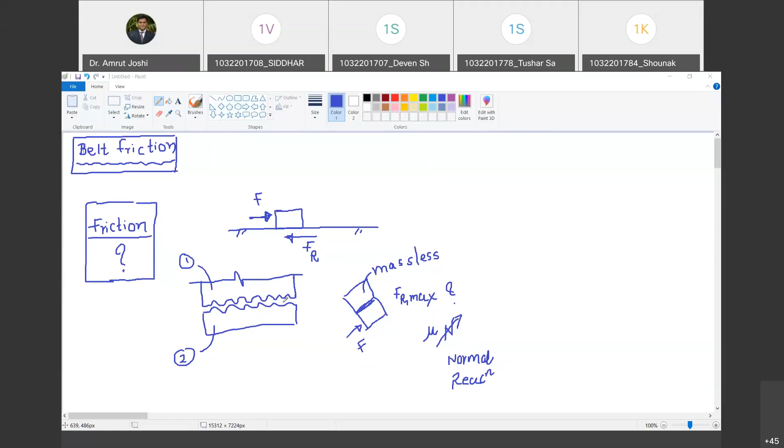Ahead. So we have these two objects which have a common surface in contact. That surface is not going to be smooth. It is going to have crests and troughs. Do you agree with me, Shounak? Yes, sir. Okay. Now, if there is a tendency of relative sliding between the two objects along this common surface, are you with me? Yes.

If there is a tendency of relative sliding between these two objects along the common surface, then there is going to be a frictional resistance. Do you agree with me? Yes. That frictional resistance will come into action only and only when these crests and troughs are interlocked. Do you agree with me? Yes. So what is going to ensure the interlocking?

The interlocking between the crests and troughs of these two surfaces will be ensured by a normal thrust. Do you agree with me? Yes. If you have a force like this, then only there is a possibility of interlocking between the crests and troughs of these two objects in contact at a common surface. Happy? Yes. Okay. So when we say normal reaction, first of all, that reaction has to be compressive in nature. Are you with me?

If it is in this direction, is it going to cause the interlocking of troughs and crests? No. In fact, it will try to separate the object. Are you with me? Yes. So therefore, only and only when this reaction is thrust in nature, thrust matlab compressive in nature, then only there is a possibility of interlocking between crests and troughs of two objects at a common surface. Happy? Yes. Okay. So we understood that this reaction is compressive in nature.

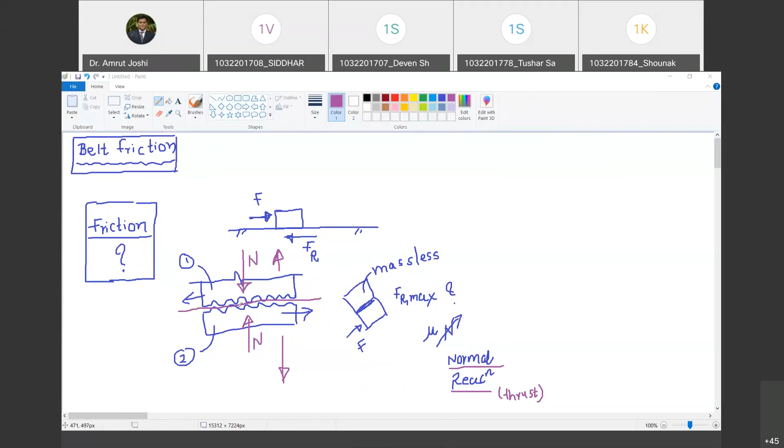So दो चीजें हमें समझ में आई. कौन सी? Point number 1, the force has to be normal to both the surfaces in contact. Are you with me? Yes. And it has to be compressive in nature. And that normal thrust is going to ensure the interlocking of these crests and troughs within one another. And that is going to give rise to the frictional resistance, because if you have to have this relative sliding, then you will have to break this interlocking between crests and troughs. Are you with me? Yes, sir.

So another observation or interpretation that we can make is, as the magnitude of N goes on increasing, the frictional resistance that can be offered between the two surfaces is also going to go on increasing. Do you agree with me? Yes, sir. So therefore, as the normal reaction or this normal thrust increases, the frictional resistance that can be offered between the two surfaces also goes on increasing. Happy? Yes, sir.

Now the question remains whether this frictional resistance is directly proportional to normal reaction. That means, is the relationship linear? If I double the normal reaction, is frictional force going to get doubled, is the question. Or whether this Fr varies as an exponential function, N power e, of this normal force. Are you with me?

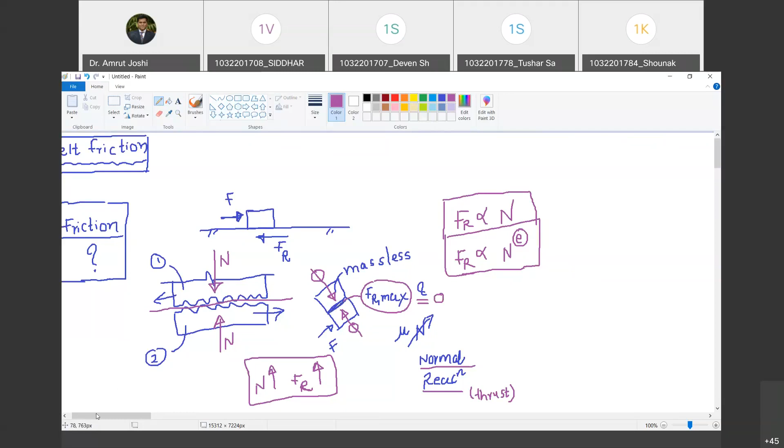Now, let us perform this experiment in a slightly modified fashion. Let us say these are the two objects in space. This is the common surface between the two objects. This is object number 1 and this is object number 2. These objects are subjected to balanced forces as shown here. So this is the force on object number 1, I am going to call it F1. And this is the force acting on object number 2, which is F2.

And these two forces are perpendicular to this line. And F2 is equal to F1. It has to be for equilibrium; we will see that later. Let me call it F itself. So दोनों forces को F ही बोलता हूँ. Now can you tell me what is the maximum frictional resistance that can be offered between the two surfaces? It is going to be non-zero. Do you agree with me? Fine. So this resistance is going to be non-zero.

Now I am going to perform a thought experiment. Obviously, I have not yet uttered the word coefficient of static friction. अभी तक वो word मैंने utter किया ही नहीं है. चलो देखो, this is the force P that I am going to apply on these two objects along the surface in contact. Just let me know, when this P is equal to Fr max, can I say the relative motion between the two bodies along the common surface is impending?

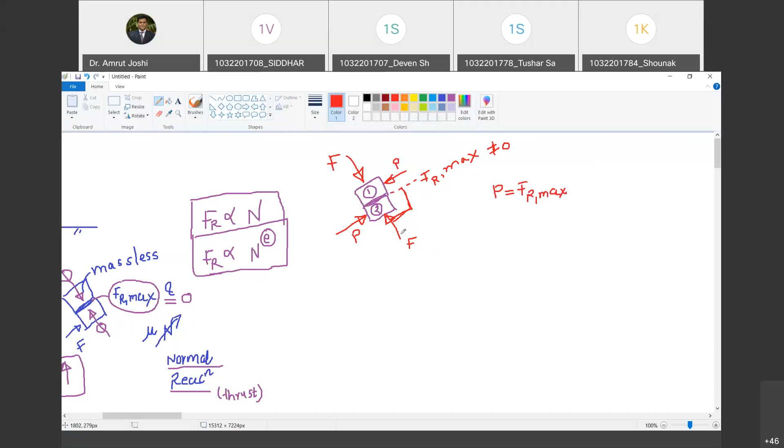Impending. This corresponds to impending motion. So impending का मतलब क्या होता है? Motion अभी चालू तो नहीं हुआ है, लेकिन P को थोड़ा सा और बढ़ा दो, the motion will begin. So whenever P assumes the value of Fr max, the maximum frictional resistance that can be offered at the surfaces in contact, that is the state when the motion is impending. If I increase P slightly beyond this, the relative motion between the two surfaces is going to commence.

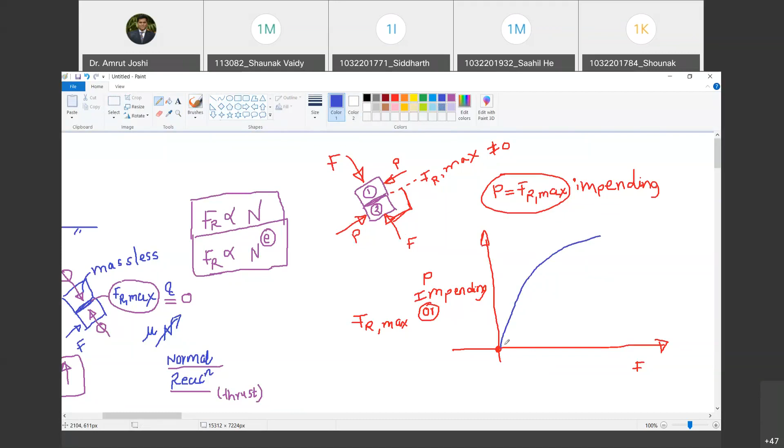Yes, sir. Okay. Now, as I go on increasing this F, जैसे जैसे बढ़ाते जाता हूँ, वैसे वैसे I know that the P required for motion to be impending, or the maximum value of frictional resistance between the two surfaces, is going to go on increasing. Happy? Yes, sir. But the question is, how does it increase? Does it increase in this fashion? Does it increase in this fashion? Or does it linearly increase? Are you with me? Yes, sir.

That is the question. So if you perform this experiment by changing the material of these two objects, by changing the cross sectional area, etc., ये सारी चीजें आप चेंज करके एक्सपेरिमेंट करते हो, to your surprise, you will find that this graph is going to be linear. Are you with me? Yes, sir. So that means the maximum frictional resistance that can be offered between the two surfaces is directly proportional to F. Are you with me? Yes, sir.

This F is also the normal force or normal thrust. Do you agree with me? Yes, sir. This normal thrust we can also denote by notation N. Are you with me? Yes, sir. So this is the graph that you are going to obtain. Linear one. Now, what is the slope of this graph? How do you find out slope of this graph? Tell me.

So what I do is, slope is delta y upon delta x. Do you agree with me? Yes, sir. So it is in this case going to be equal to delta P upon delta N. Do you agree with me? Yes, sir. So I will choose 2 points where delta N is forced to be unity. ये 2 points ऐसे है जिसमें if this is N1, normal reaction 1, and this is normal reaction 2, or this is F1 and F2. Are you with me? Yes, sir. I have chosen this N1 and N2 in such a fashion that N2 minus N1 is unity.

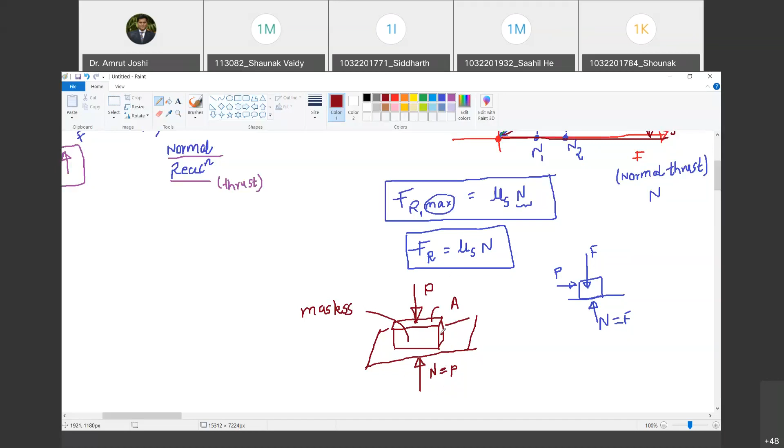Yes, sir. And I apply force Q here. Tell me, what is the value of force Q that I will have to produce in order to commence sliding of this duster on the table? कितने amount का force मुझे लगेगा बताओ?

So mu s into P. Coefficient of static friction between the two surfaces is mu s. So I will have to produce at least mu s times P force. Do you agree with me? Yes. So mu s times P plus small delta. This force will ensure that the block is moving towards right. Are you with me? Yes, sir.

और in other words, इसको ही दूसरे तरीके से describe करते हैं. Mu s times P is the maximum value of Q for which there is no motion. Do you agree with me? Yes, sir. तीन तरीके के डिस्क्रिप्शन में आपको बताने वाला हूं. Mu s times P is the maximum value of Q for which there is no relative motion between the duster and the surface. Happy? Yes.

Mu s times P is the value of force that I must apply on the duster to have the impending relative motion between duster and table surface. Do you agree? Yes, sir. Impending motion मतलब मोशन अभी चालू नहीं हुआ है, बट Q को और थोड़ा बढ़ाओ हो जाएगा. Are you with me? Yes.

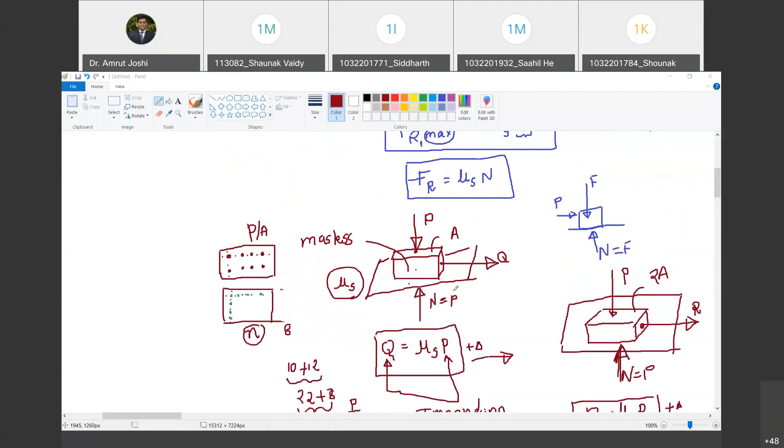As I go on increasing normal force or normal thrust, the maximum frictional resistance between the surfaces also goes on increasing. Do you agree with me? Yes. Rougher the surface, the frictional resistance goes on increasing in a stiffer fashion. So that means this line will approach y-axis. Are you with me? Smoother the surface, this line will approach x-axis.

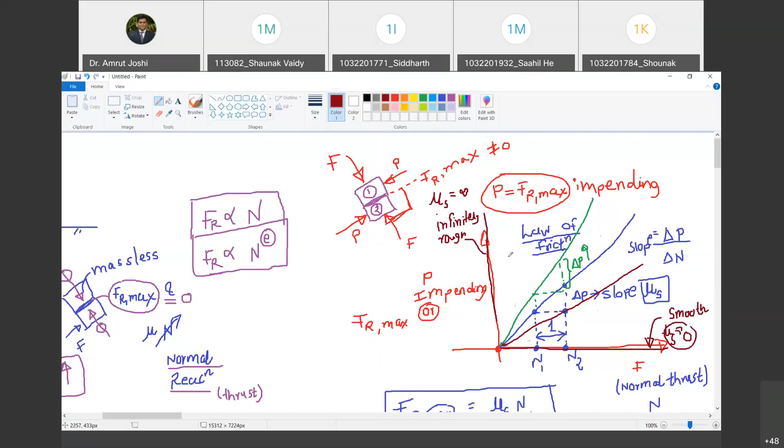For smooth surface, mu s is 0. For infinitely rough surface, mu s is infinity. For all normal surfaces, this line is going to lie between these two. Happy? Yes, sir. The maximum frictional force offered between the two objects at a common surface is going to be independent of area in contact. Do you agree with me? Yes, sir. It only depends upon the normal thrust and coefficient of static friction.

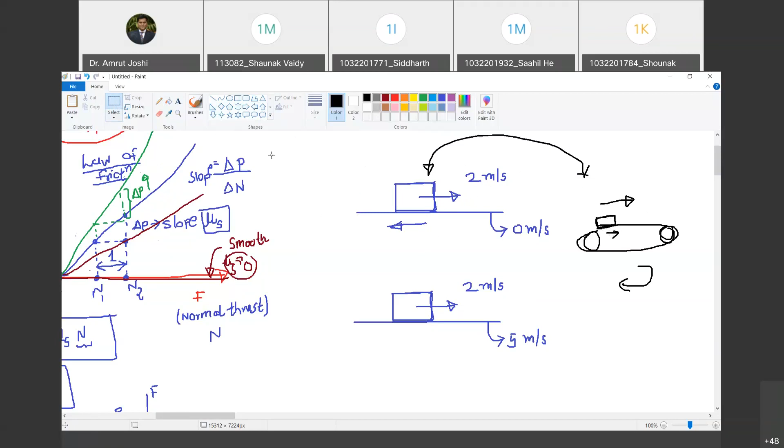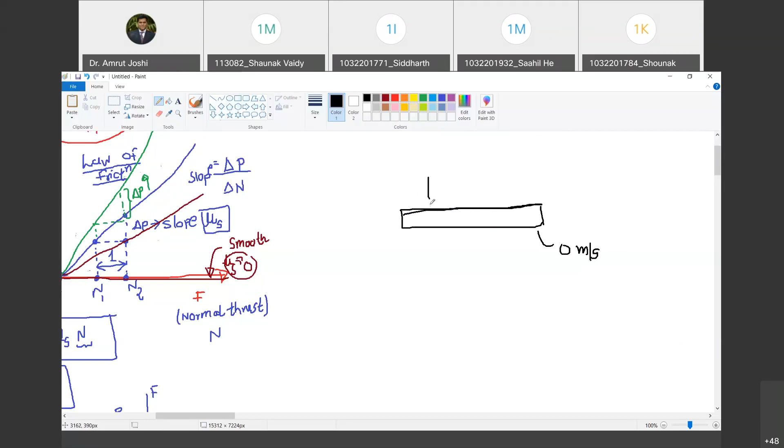So let us clarify that point. Henceforth we will never say that the frictional force is in the direction of motion. It doesn't have any sense. Why? Consider this situation. The table is not moving with any velocity with reference to the observer who is external to the table; its velocity is 0 meters per second. Are you with me? Yes. And there is a book or a duster on the table which is moving with the velocity 2 meters per second with reference to external observer.

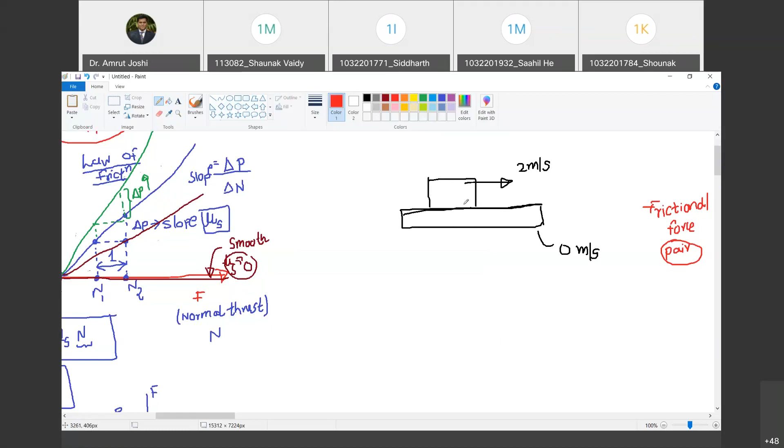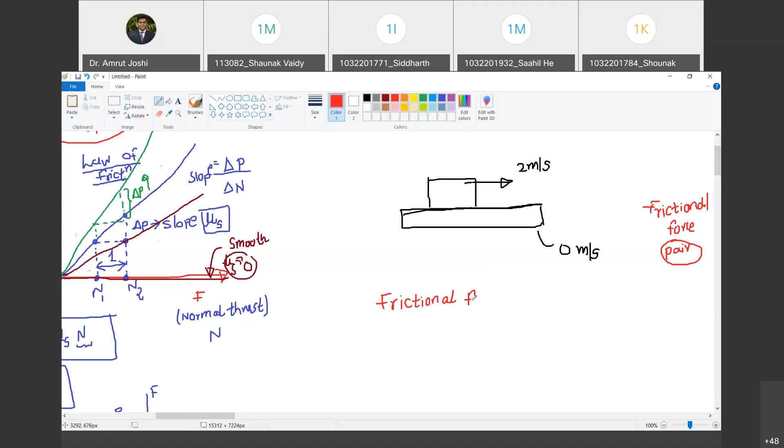I have been asked the question, tell me the direction of frictional force applied on duster. Happy? On duster. This is the question being asked. So who is going to apply the force? Tell me. Who applies the force? Frictional force. Bolo.

One minute. Table. If I were asked about the frictional force applied on duster, there is nothing else, two objects are in touch. So therefore who is going to apply the frictional force? Table. Do you agree with me? Yes sir. So on duster the force will be applied by the table. Is it very clear?

Now pay attention here. You station now the observer on table. I will ask the observer to stand on table. Are you with me? Why? Because I want to find out frictional force applied by table on the duster. So make the observer stand on table which applies the frictional force. Understood? Now with reference to that observer, how is the duster moving? Is it moving towards right, away from the observer?

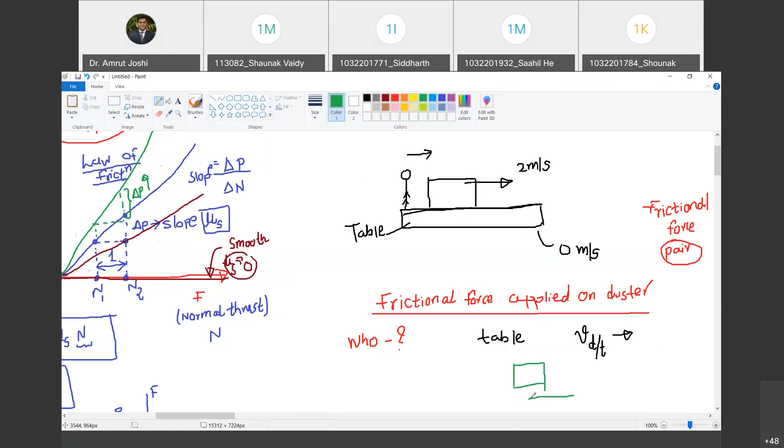So what are you observing? You are observing velocity of duster with reference to table. Do you agree with me? Because you have stationed the observer on table. And it is towards which direction? Towards right, in this case. So now the table will apply the frictional force in opposite direction to this velocity. So on duster, if I draw the diagram, the table is going to apply frictional force in this direction. Happy? In this case. Understood or not?

Now, let me ask you another question. What is the direction of frictional force applied on table? Which force has the duster applied on the table? In which direction is it? Are you with me? In the opposite direction of FR. No, wait, but we will stick to this notation.

So who is applying the force? Tell me. Duster. On table, who is applying the frictional force? Duster. Do you agree with me? So I will station now the observer on duster. Understood? Now with reference to the observer on duster, table is moving in which direction? To the left.

Very good. So now I am going to observe velocity of table with reference to the observer situated on duster. Do you agree with me? And it is towards left. So therefore, the duster must be applying a frictional force opposite to this velocity on the table.

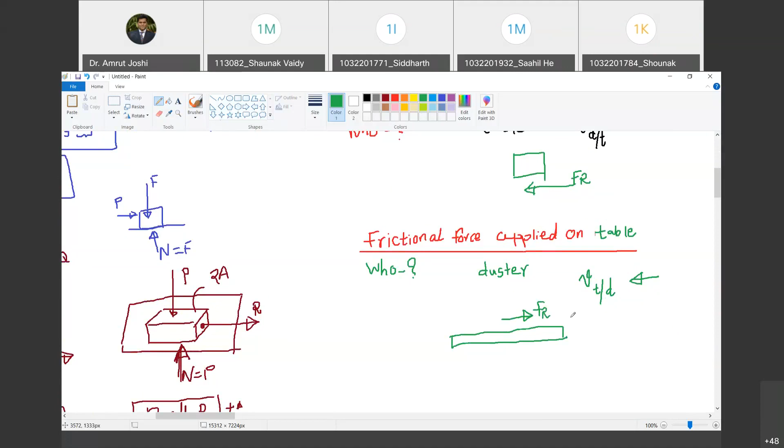Do you agree with me? Yes. So now can you precisely answer me the question, how should I decide the direction of frictional force? It is not definitely opposite to the direction of motion. उसको कोई meaning ही नहीं है. Because frictional force is a pair. It is applied by both the objects on one another.

So if I am asking you to find out frictional force exerted by object B on object A, are you with me? Yes. Then you are going to find out relative velocity of object A with reference to B, और उसके opposite direction में object B ने A के ऊपर frictional force लगाया है. Are you with me? Yes, sir. This is the answer. So you have to always look at relative velocity and you have to station the observer on the object which is going to apply the frictional force.

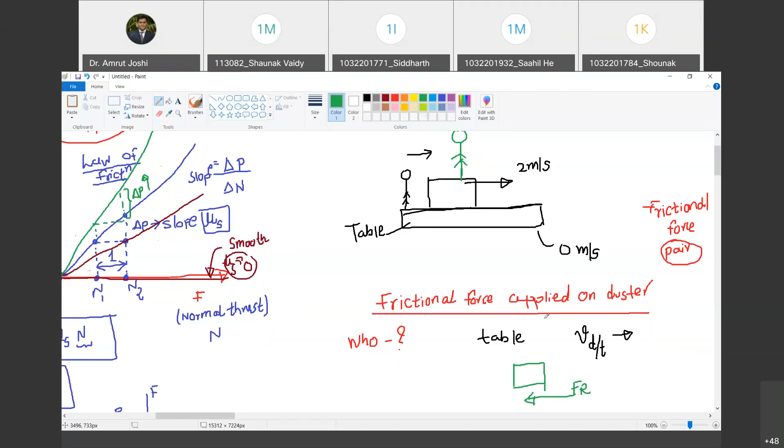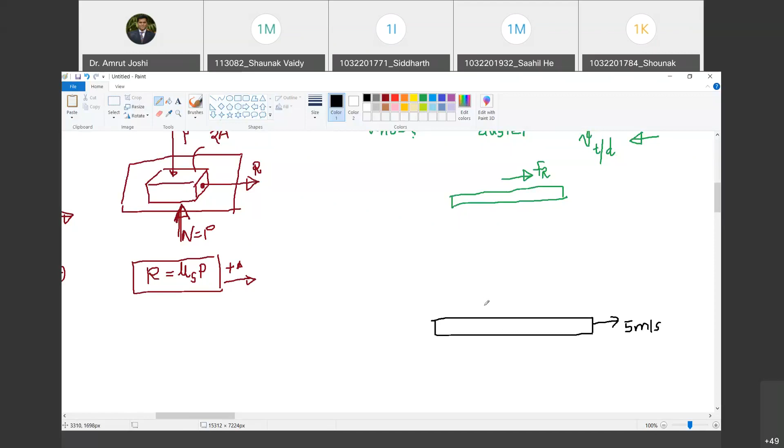Happy? Yes, sir. चलो इसको एक और एग्जांपल लेके क्लैरिफाई करते हैं. The second example. Now table is moving with 5 meters per second. Are you with me? And you have a duster placed here.

Acha, Shaunak, is it from your side? No, sir, it's from Yuvraj. Not your side. So others, I request them to switch off. Yuvraj, close. युवराज झगड़ा मत कर. Yuvraj, please unmute yourself. I think he has muted.

So now, this is 5 meters per second. Are you with me? And this velocity is 2 meters per second. Happy? Yes, sir. This is duster. This is table. I am interested in frictional force on duster. So who is applying the force? The table. So where should I station the observer? On the table.

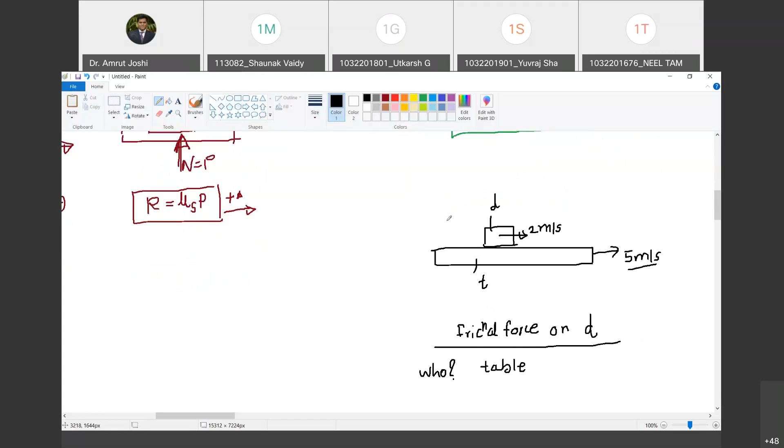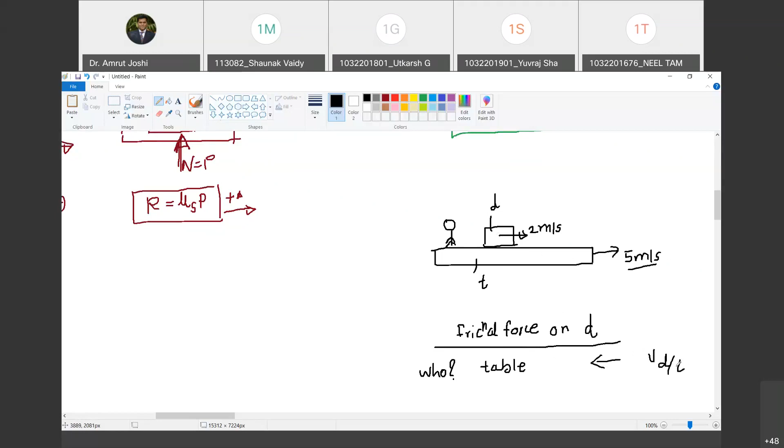With reference to table, this duster is moving where? To the left, because the table is moving at a faster rate than the duster. So observer on the table will feel that this object is moving towards left. Are you with me? Yes. This is velocity of duster with reference to table. So therefore frictional resistance offered on the duster by table must be towards right. Do you agree with me? Yes. Great.

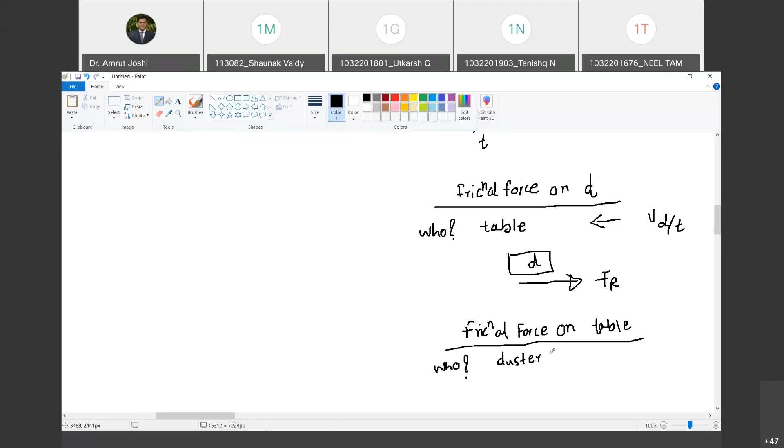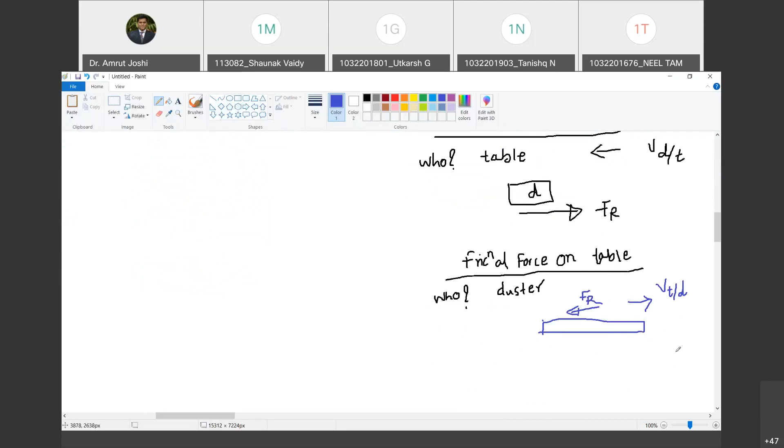Now let us write down the frictional force on table. So when I'm looking at the frictional force on table, who is applying the force? The duster. So where should I station the observer? On the duster. With reference to duster, how is table moving? To the right. So therefore, this is velocity of table with reference to duster. So therefore, on table, the duster must be applying a frictional force of this sort. Happy? Yes.

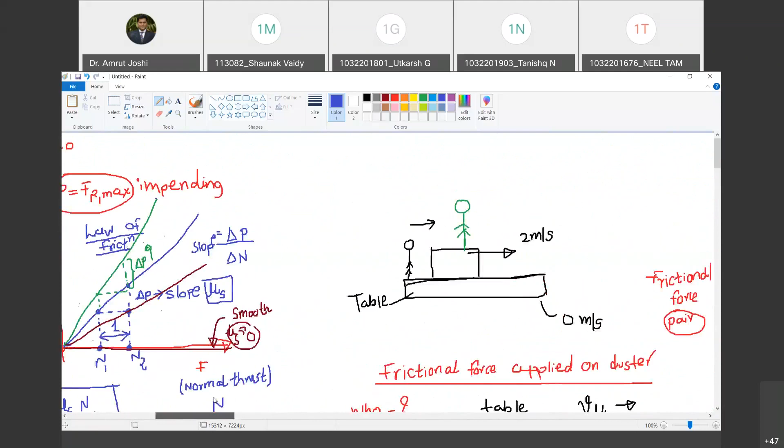So we have understood two things here. One, frictional force is not a single force. Frictional force always prevails in pairs. Do you agree with me? And the direction of each of the frictional force will be decided by the procedure that I described. Happy? Yes. Okay. So फ्रिक्शन के बारे में बहुत सारी चीजें जानने को मिली है. कौन कौन सी लॉ ऑफ फ्रिक्शन सीखा, उसका direction के बारे में सीखा. We understood that the maximum frictional force is independent of area in contact.

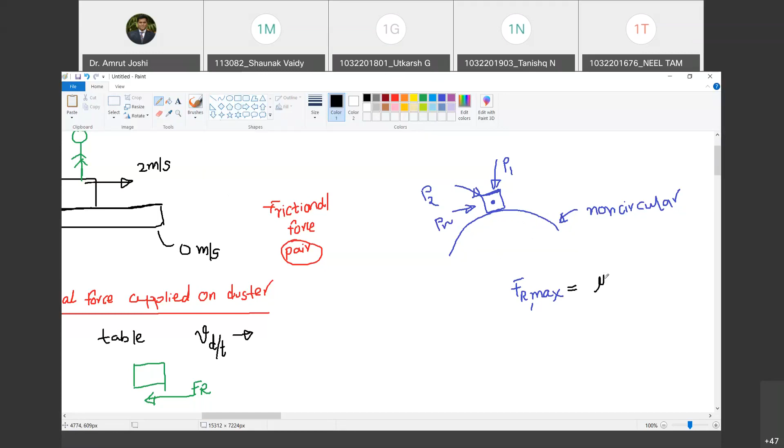एंड द क्वेश्चन दैट आई हैव बीन आस्क्ड इज, under the action of all these forces, I want to know what is the maximum frictional resistance that can prevail between the two objects, the curved one and this block. So I have to find out Fr max. समझ में आ रहा है प्रॉब्लम? Yes, sir. By law of friction, the maximum frictional resistance that can be offered must be equal to how much? Mu s into vertical component of all the forces. No, mu s times N, normal reaction.

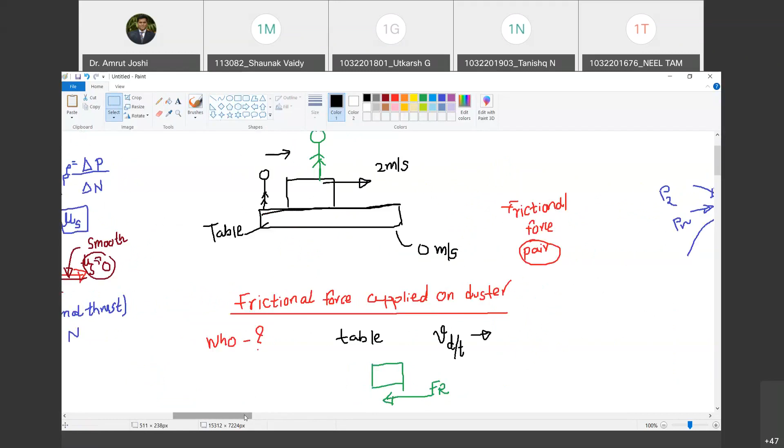Like given the area of contact, the normal acting on the area of contact. Yes, but look at this figure. So do you understand that wherever there is a contact between these two surfaces, it has to be along the common tangent to the surfaces? Yes. तो मैंने इस straight line surface को भी tangent निकाला. That is that surface itself. And if I draw the tangent to the curved surface at the location of contact, it is going to be a common tangent.

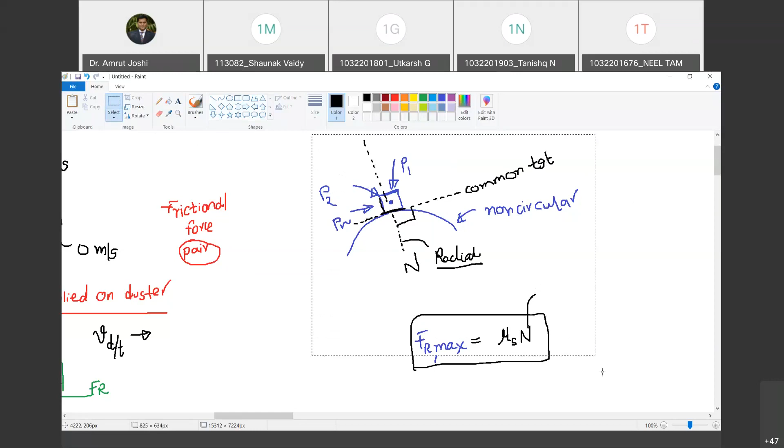So we have discussed lot of things as far as friction is concerned, but we have not yet touched the experiment. So what is the experiment that we are going to do? We are going to deal with belt friction this time. So what is belt friction?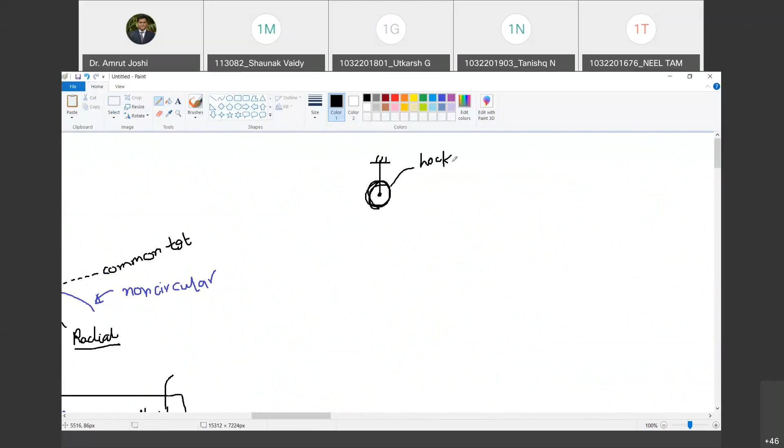And now let us say you have a mass m suspended on one side. So what is the force corresponding to it? It is its self weight, that is mg. This I am going to call W. Now I have a plate attached here, and I'm going to go on adding masses to this, such that the motion is just about to commence in this direction. Are you able to understand what I'm trying to say?

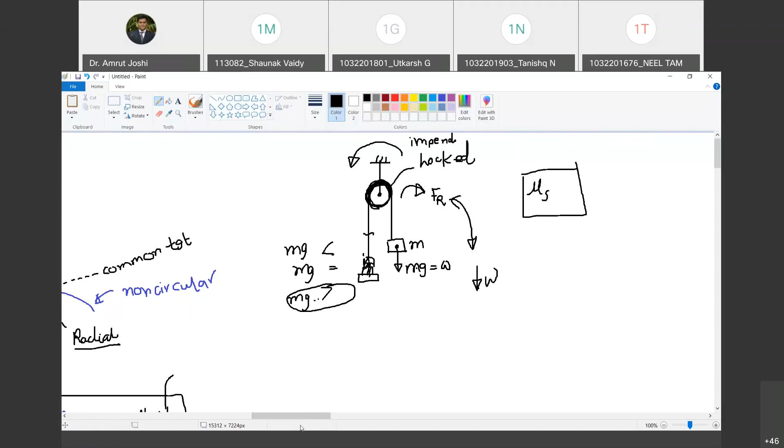So all the things I told you about friction so far are absolutely necessary when we start the chapter on friction. With this we will close for today. Next time, sir, it will be on pulleys? Next time it will be on pulleys.